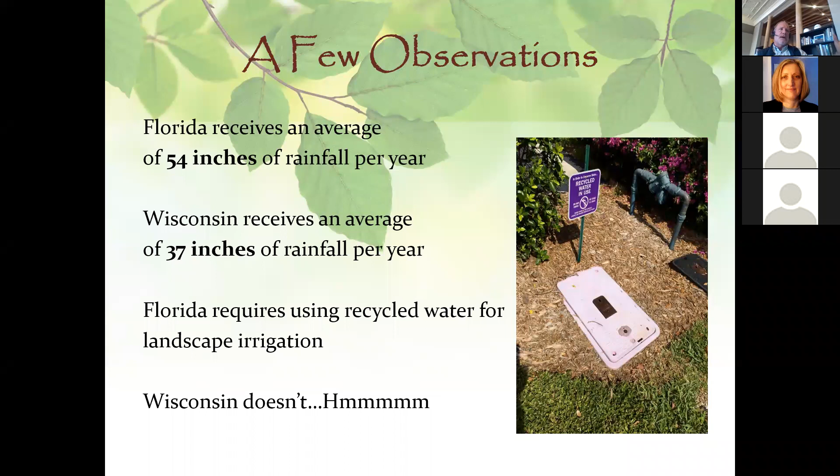This I thought was really interesting, that Florida receives an average of 54 inches of rainfall per year, Wisconsin about 37, and yet they're required to use recycled water for landscape irrigation. And Wisconsin doesn't. And I think it's just because here in the Great Lakes region, we've been spoiled. We've always had as much water as we need, usually, at our fingertips, and we don't think of it. We don't have that relationship with it that they do in Florida. So, just a comparison here of what's happening in other parts of the U.S.

Even. And I was just in Seattle a couple of months ago, and this was in the airport. So they have an average of 152 rainy days per year, but their average rainfall is very similar to what it is in Wisconsin. But yet in their public spaces, institutions, airports, they're harvesting rainwater to use for flushing toilets. And I think you're going to see more and more of this.

We're going to have to make these decisions. We're going to have to implement these strategies if we want to really consider long-term consequences of using fresh, potable drinking water for uses that we don't really need to use fresh, potable drinking water for.

In Civil Engineering Magazine, this was a few years ago, the challenge was huge droughts in California, and now they're back. They had a couple years of reprieve for snowfall in the mountains, but we're right back to where we were. Major problems in California and the Southwest. So their answer was new, larger, multi-million-dollar infrastructure. Again, engineering our way out of it, engineering it to fix it.

And I understand why we do that. I mean, I'm not against it, but we're not really thinking about other ways or other means of how we relate to water use, and how water in certain regions is not as plentiful.

So let's make it as plentiful as possible, because all we're doing is creating an artificial ceiling of how much water we can use. So again, the answer is always let's just engineer our way out of it, and that has been proven that is not always the answer.

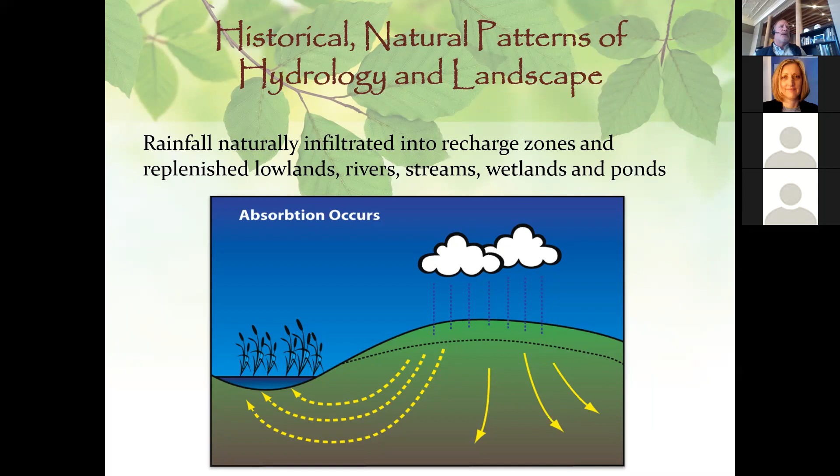So historic natural patterns of hydrology and landscape, this is what used to happen on the landscape. I don't have to go through the water cycle with you, but the difference is that there was just a lot more vegetation and topsoil and infiltration that was recharging our groundwater, recharging our wetlands, and it all happened hydraulically below the surface. It wasn't about runoff, it wasn't about sheet flow, it was about a natural process, a sponge that would then replenish our rivers, streams, wetlands and ponds.

And what's interesting about that is when you really start to look at what happens, there can be a 2-foot difference in elevation on 160 acres in, I'll just say Antigo, Wisconsin. And in the lower areas, you have tag alder and basswood, and then the elevation just rises 2 feet over 160 acres, and now you have oak and hardwoods and maple. And that's because this vegetation is adapting to where it wants to grow.

And I think tying that back to green infrastructure and site design, we really have to start thinking about these sites and these places and these parks and whatever project you're working on, and think of it like these little microclimates, these little miniature ecosystems, and what does that mean in terms of selecting vegetation that's going to appropriately grow there or want to grow there without a lot of arm wrestling and unnecessary management in order to force it to grow where it doesn't want to grow.

So again, looking at nature, you can really pick up some of these cues and just see it happening right in front of you. And then when you can take that into the design realm, it really helps determine a better solution, in my opinion.

So then the impacted man-made, designed and manipulated patterns of hydrology and landscape: we came along, we strip off all the topsoil, we compact the subsoil, we sheet flow everything, we cut off that infiltration, we come back with a paintbrush, we put an inch of topsoil on top of the subdivision or the site or whatever, and then we say, hey, we're done. And what we've done is completely interrupt the natural process of how rainfall used to integrate with the earth and with the site.

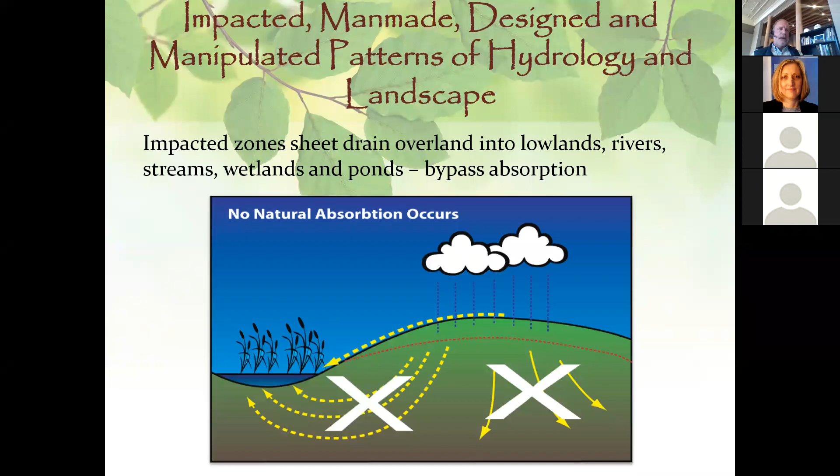Now I realize you can't do this on every site. I realize you can't do this on an urban site sometimes because they're contaminated. I'm just saying it's a way that we've been trained to do it. Strip the topsoil, compact the subgrade, regrade the site, come back with a paintbrush, compact all the oxygen out of it, take out all the nutrients, and then expect things to perform well. And again, we really need to rethink what that means in terms of design and site design.

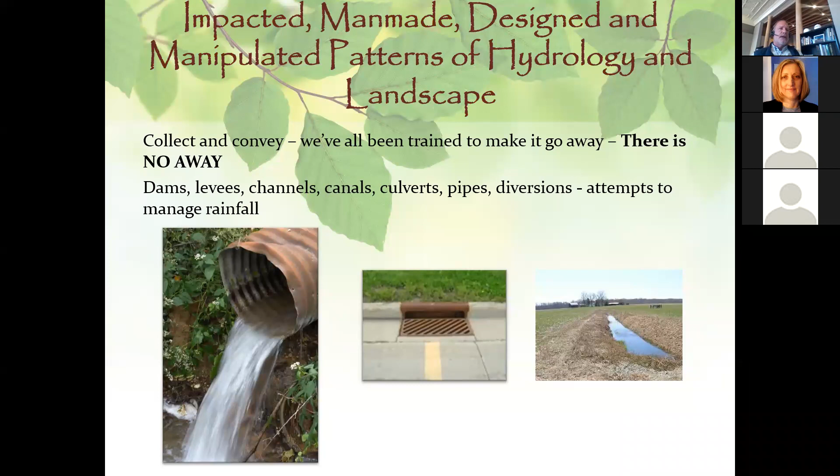So this is where I always said, there is no away. We get it to concentrate, we collect it, we convey it, and then we make it go away. But there really is no away. It has to go somewhere, and we have to be conscious about what that means. And so here's a perfect example of that I think we can all relate to, being in the Milwaukee area. When I was a kid, they came and they channelized all of the tributaries in the Milwaukee Menomonee River, and it was very, very efficient.

So they thought, and it was very, very expensive. And there were obviously a lot of unintended consequences. Well, it's obvious to us now. I guess at the time it wasn't obvious, but what they created was a velocity in these tributaries that was so unmanageable. All it did was create more and more flooding, and it had a lot of negative consequences downstream. It was impossible to mitigate.

And so after 30, 40 years, we said, well, we really have a problem. And so now there is a project throughout the community. You've seen this at Jacobus Park, and they've done this along Lincoln Creek, and it's excellent. It's just wonderful to see that they're de-channelizing these. Maybe they can't bring them back to what they normally were with floodplains and alluvial areas, but at least they're trying to create more of a natural environment and letting nature do what it intended to do.

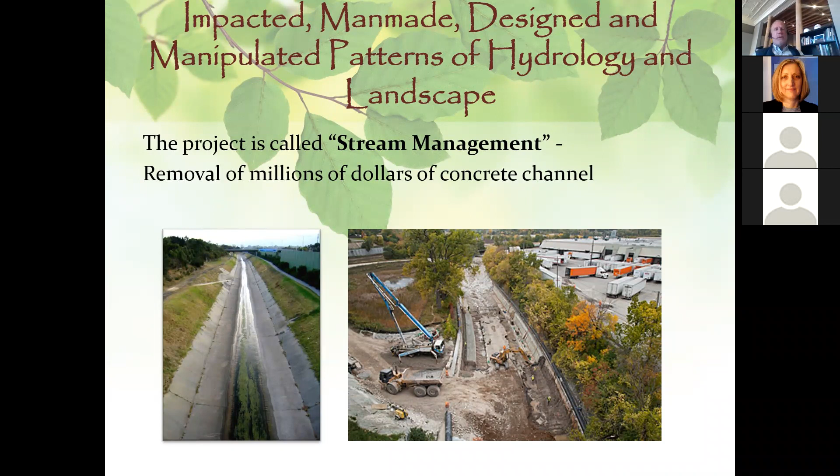So they call this project stream management. I call it mismanaged stream unmanagement, because it was mismanaged, and now we're going to unmanage it. We're not going to try to control it. We're not going to try to engineer it. We're going to use principles and methods that we take from nature: we create more storage capacity, more floodplains, more areas in the landscape for that water to go and slow down and do what it naturally used to do.

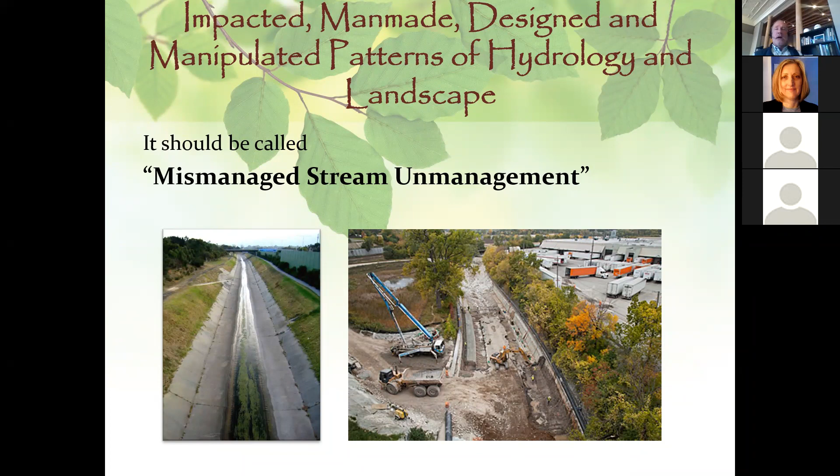Now, again, we can't bring it back to pre-settlement situations, but it's something to think about that we called it stream management because we think humans can control everything. So we're going to manage the stream, and we're not. We have to unmanage the stream because we've mismanaged it.

So I always infiltrate water where practical, and it's not always practical everywhere, so sometimes we don't infiltrate. I'll talk about that in a little while. But I'm a huge fan of permeable pavers in this climate. I know other regions use permeable asphalt and permeable concrete. I'm not a big fan of that. I've seen it used here, and it's marginal at best unless it's maintained a lot. Because of our freeze-thaw cycles, permeable pavers have really proven themselves to be a very good and effective way to manage stormwater.

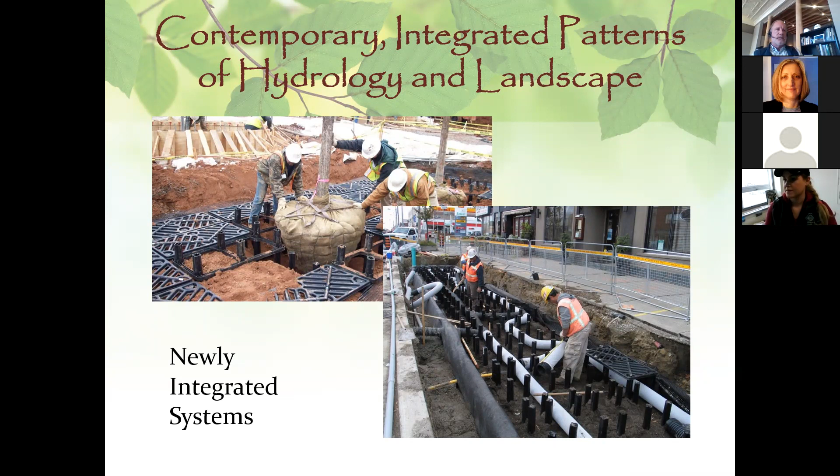So again, this is just a different way of thinking. We're seeing a lot more of this, and I think you're going to see more and more of this as time goes on, especially in the urban environment. Yeah. There's a quick question about the blue roofs versus the green. Is blue better than green? I mean, I'm sure there's pros and cons to both.

Yeah, there are pros and cons, and that's a good question. It depends on what kind of green roof. I've worked on green roofs like the Madison Children's Museum rooftop, where we had a soil capacity and a soil depth of up to 18 to 24 inches to work with. Now that I can work with, but when you just put in these 4-inch deep sedum trays and you don't maintain it, if you've ever seen a green roof after 8 years that hasn't been maintained, it's pretty much dead because of the freeze thaw.

Now it's still acting as a sponge, and it's still performing some sort of a stormwater detention aspect to it. But I'm not a huge fan of those tray green roofs. I've used them, and I understand that they have a place and a purpose. But if you're going to do a green roof and you can really make it a people place and use it for placemaking and do something with the terrain and the soil depths, I think it's a lot more effective.

I think the blue roof is kind of a simple approach to holding back stormwater, and it's a lot less, I would call it, maintenance than a green roof. So it's sort of like pick your poison, and a lot of that has to do with the facilities management, who is taking care of the facility, who's managing all of those aspects. If you have the staff and the capacity to do it, that's great. If you don't, then that's probably not going to be your best choice.

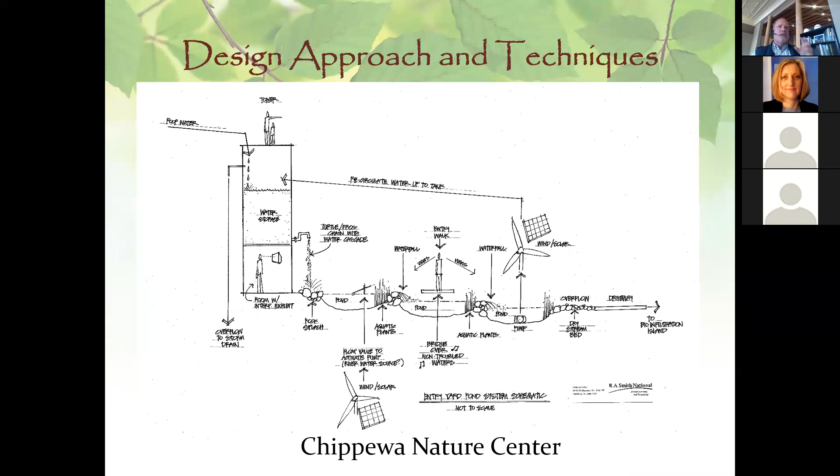And I don't expect you to read this, but this is just a graphic that I came up with that I shared with the design team so that we could all get on the same page about how we want this system to work. The water comes off the roof and it goes through this system and then it goes into this and it happens to here. And then our last line of defense is into the bio infiltration island. But as we were talking, everyone was having a really tough time visualizing it.

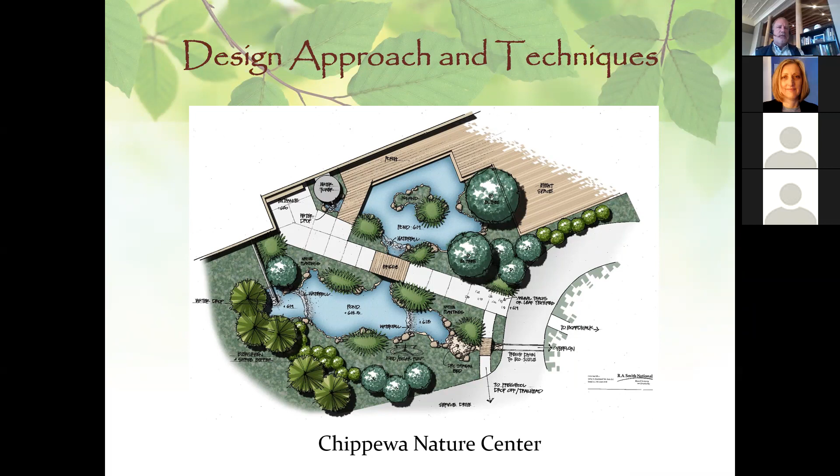And then as the design evolved, this is kind of what we came up with for our entry sequence. And this is all stormwater related. It really took this roof water that normally would have just gone away somewhere, and we've actually created it into a landscape feature that even when it doesn't rain and it's dry, it still looks very dynamic and very natural. It doesn't look man-made or very contrived. It looks very, very natural.

River Edge Nature Center was another project I was involved in where it was a one-story structure that was being proposed for indoor-outdoor classrooms, blurring the lines between inside and outside. And at one point they wanted to talk about a green roof. And I'm like, you're among thousands of acres of woods and natural area. You don't need a green roof. No one would see the green roof. Kids don't go up there. They don't even know it exists on a one-story structure. You're not looking down on it.

Let's get that water off of the roof and create a dry stream bed that has bridges and rocks and plants and rain curtains so that when it is raining, kids can actually see it interact with the landscape. And it becomes a much more creative way to create awareness of rainfall and how it interacts with the landscape instead of just trapping it up on the roof where no one was going to see it, appreciate it, or even know it existed. So again, these are fun things that you can do to challenge the design team.

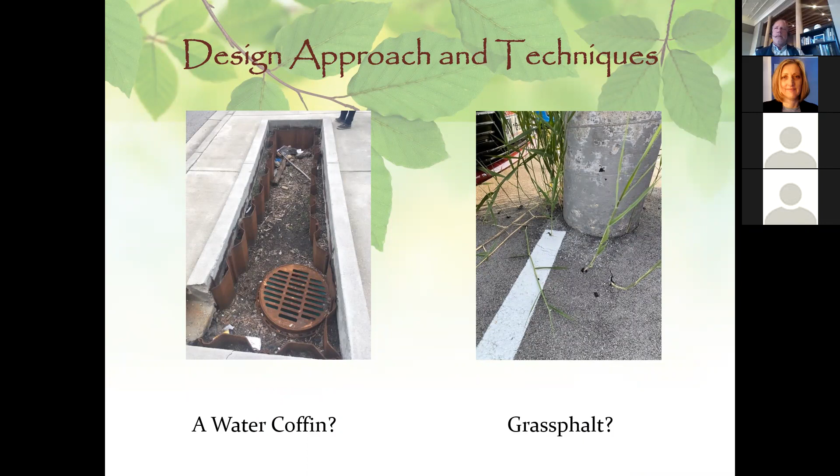But my colleague Nancy Wilson sent me this picture on the right, and I just loved it. She's like, this grass really wants to grow in this asphalt, so I called it grassphalt. But it's amazing when you start to see elements of nature trying to creep in and kind of take back what is left of the natural environment.

So there's 3 types of configurations for stormwater basins, if you will. One is full infiltration that I was talking about, partial infiltration. Some soils will infiltrate some, but some of them are just a flow through. So there's no infiltration. The water just passes through these systems. It slows down, it traps sediment. The plants absorb that water, but it's not an infiltration type system.

And then there's 3 types of geometry that we use, and that's the true basin. There's also planters and swales. That grass swale I was showing you out at Pabst Farms, that was a super wide swale, but it really manages water in a very effective way.

And the other thing about these systems to consider is if you have enough space, is to try to avoid a single inflow into these systems. Don't try to cram as much water as you can into one pipe and throw it in here. You're going to have a lot of major erosion problems. So if you can dissipate that and spread it out and allow water to come in various areas slowly, you will mitigate erosion problems and other scouring issues that you typically see on some of these systems.

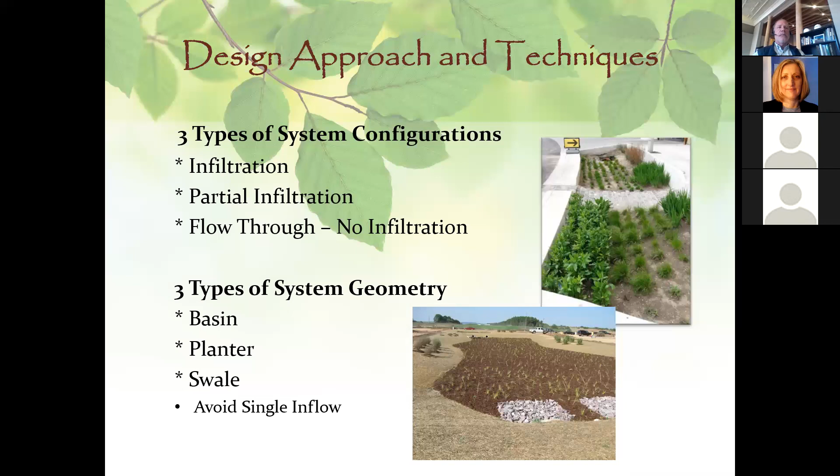I know we all want to save money and we want to save pipe, and we don't want to cost our clients any more money. But if you want it to be successful, you have to start thinking differently about how to get water into these systems and then how to manage it.

And there's a quick question: as you're going through all these, can you just talk about, are these your own design codes beyond the traditional stormwater designs that you see in most communities? Where do you get these codes? The question's coming from a municipality north of Milwaukee, and I'm sure the community is looking at how they would incorporate the codes into their community.

That's a great point, and I was going to touch on that later, because municipal codes and ordinances when it comes to landscape are way behind the 8 ball on green infrastructure. It's starting to change, and I've met with many communities throughout the state to talk about how do you implement some of these things. We worked on a project with the City of Milwaukee Department of City Development on updating their landscape. We didn't change the code.

The code is the code, and sometimes changing code, as you know, Carolyn, is like reversing the magnetic poles of the earth. It takes a lot of time and money and effort to change a code. But what you can do is you can augment it, and you can create, like we did for the City of Milwaukee, incentives for some green infrastructure on non-compliant sites and really start to look at your codes and ordinances from a landscape perspective. And I'll touch on that later, to try to incentivize, if you will, developers and property owners to implement some of these strategies. But you got to give them a carrot. You got to give them a reason to want to do it.

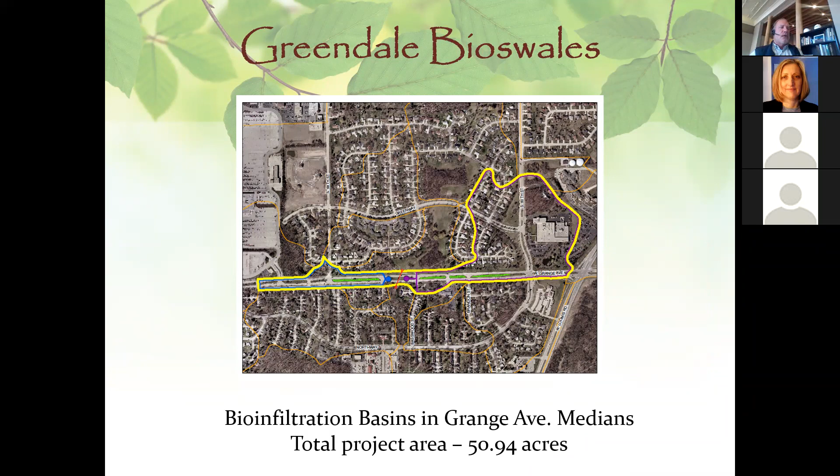We're constantly learning. We're constantly challenged to try to do better on the next one. I'll go through this really quickly. Greendale, if you've been to the village of Greendale, this was a very large, robust project in the medians along Grange Avenue. Total project area was 50.94 acres.

So what does that mean? It really traps a lot of water, removes 770 pounds of TSS annually. This was originally done with what I call a busy-scape, or like I was saying before, complicated and vague. And because of that, it made it very, very difficult to manage this project with village staff, because the village staff, they're not botanists, they're not horticulturists, they're summer help.

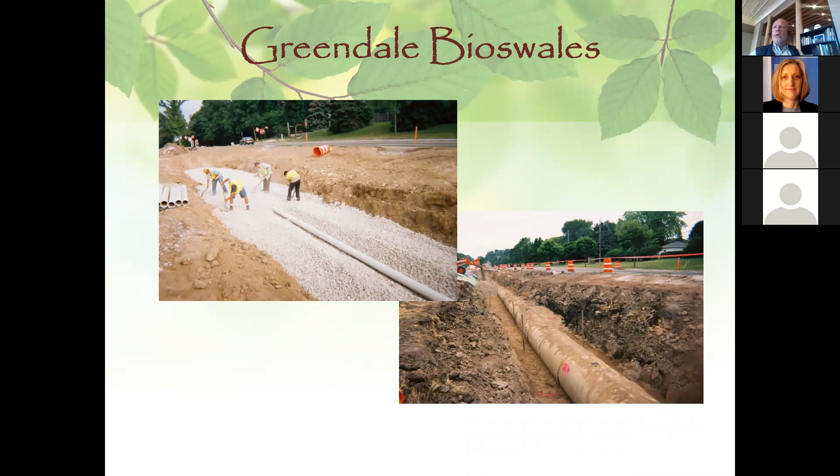like turf. The interesting thing about that, though, is when they cut it down and they mowed it like turf, it was still functioning, and water was still infiltrating through it. So it was still doing some good, but all the plants were basically gone. So we got brought in to redesign this, and what I did is I went big and bold.

So at 35 miles an hour in a car looking out the window, you can actually appreciate this landscape because it's big and bold, and it really is a lot easier to maintain, because when you have a big glob of plants and they're all one type of plant, you can pretty easily identify what's a weed and what's not supposed to be there.

So that was kind of the effect that we used, or the method that we used, to try to mitigate or reduce the maintenance for staff that isn't necessarily knowledgeable about plant material, is just keep it simple. Don't try to plant one of everything. Use things in big, bold swaths, so that when they are in bloom, you can go through there and see what's not working, or what the problem is.